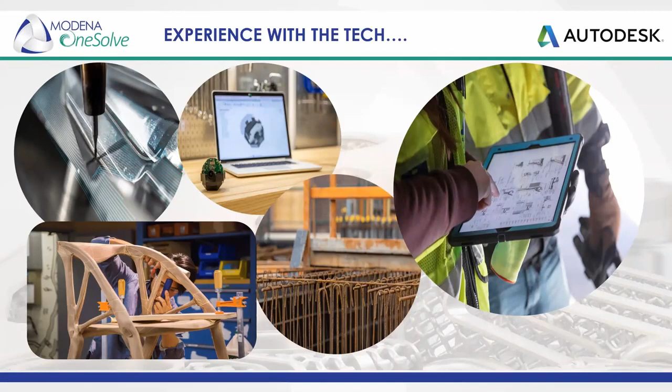So first, I want to show you guys and whet your appetite about the new possibilities we get in BIM and Vault, BIM 360. I know a few customers had a concern about what the future holds for Vault, but with this integration, you'll see Vault is definitely here to stay.

Autodesk Vault 2020 continues to improve design collaboration with Project Sync in Vault Professional, directly in response to your feedback through the Autodesk community. Working with our Vault customers who manufacture custom building products around the globe, we see more and more projects that require design collaboration outside your company's firewall.

New in Vault Professional is Project Sync, a secure way to share just the data that you choose between Vault and BIM 360.

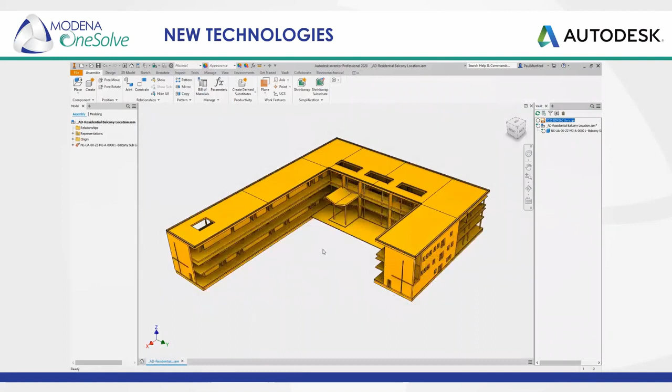Autodesk Vault is purpose-built to help our customers efficiently manage their engineering data, improve collaboration within their teams, and take control of the design development process.

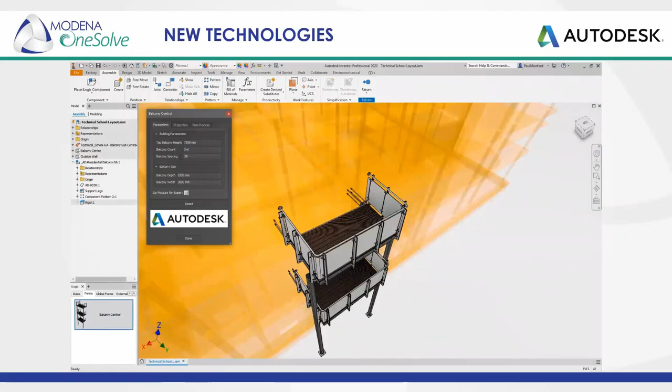BIM 360 is an online platform connecting your project teams and data in real time, from design through construction, supporting informed decision-making throughout the project lifecycle.

Eliminate file sharing by email, eliminate the need to download or upload files from an FTP site, and reduce the opportunities for errors in transmission.

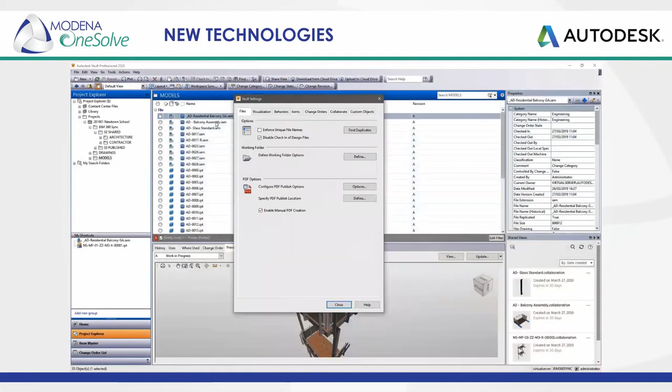Now your relevant design data is synced between Vault and BIM 360. Upload from Vault to BIM 360, download from BIM 360 to Vault, or set up specific folders to sync in both directions without the need for user interaction. As the project administrator, you can control on a project-by-project basis which data should be pulled from BIM 360 to Vault, pushed from Vault to BIM 360, or synced in both directions.

To be clear, it's not all your data—just the data that you choose will be synced, with full permission control. Streamline collaboration by securely syncing selective data to your extended project teams with Autodesk Vault Professional and Project Sync.

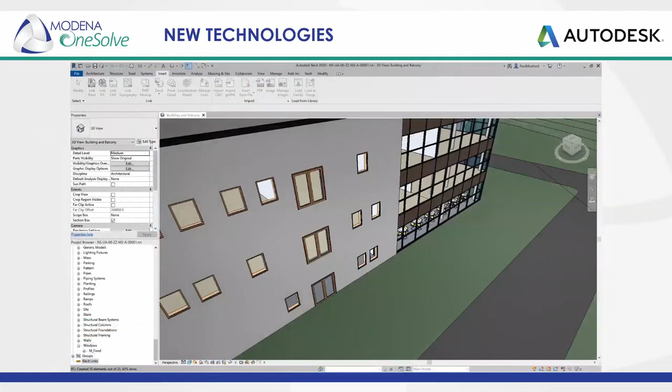Autodesk Vault 2020 continues to build on your feedback from Autodesk Ideas, forums, and the beta community with these usability improvements.

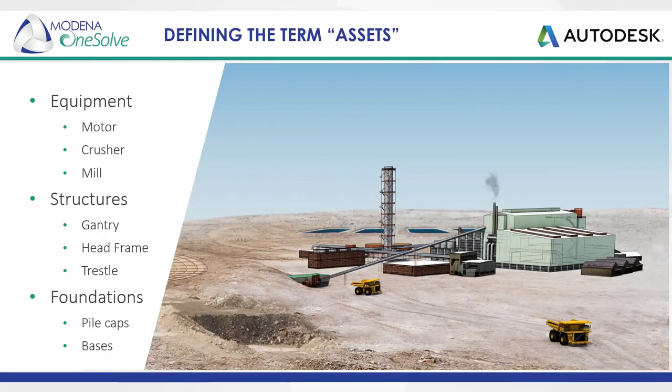Before we start talking about the tracking of assets, we need to actually look at what defines the term asset. Now, it's not assets we talk about in accounting terms—this is anything that can be populated on a list. It's anything that we can actually define on that list, and that means we can track it. So whether it is equipment, structures, or foundations like pile caps, we actually define that as an asset in BIM 360.

We're tracking different materials and assets throughout this life cycle, from when it's digital to when it's installed on site. It controls basically everything on the project, and that's why I mentioned it—it's the key underlying factor for us.

It controls our costing, it controls our schedules, and more importantly, it triggers milestones. Certain installations or certain structures going up and being commissioned at a certain level will trigger a milestone for the customer, and then they release payment on that basis.

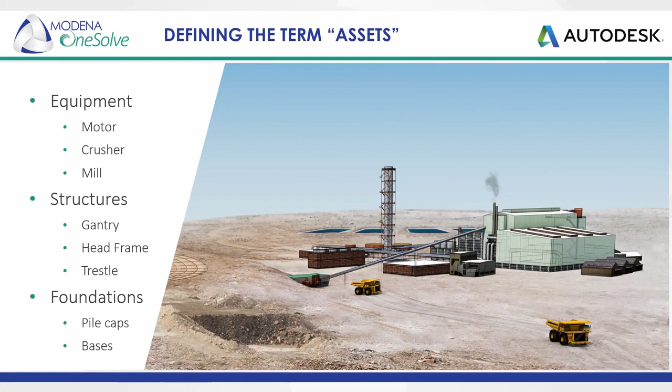Now, I think if we can imagine, by not doing these things and not tracking the assets, it can actually have dire consequences to our project and future to our company as a whole.

So for years, companies have actually tracked their assets via Excel or via little notepads, even from the stores, collecting a little book with that carbon paper in it. I don't know if some of you can remember those, but they did have a system of tracking it.

Now with today's fast-paced world and the need for information a lot quicker, we need these types of systems to become more intelligent. And when I say intelligent, I don't mean just updating the asset and the status of that asset, or where the asset is on site.

I'm talking about going further—about where an asset update triggers an invoice, a model that automatically gets updated, schedules that should be adjusted, things like construction sequencing being affected because a part's not on site, but then an early alert has to go out. That is where we would like the BIM 360 asset module and Build to go.

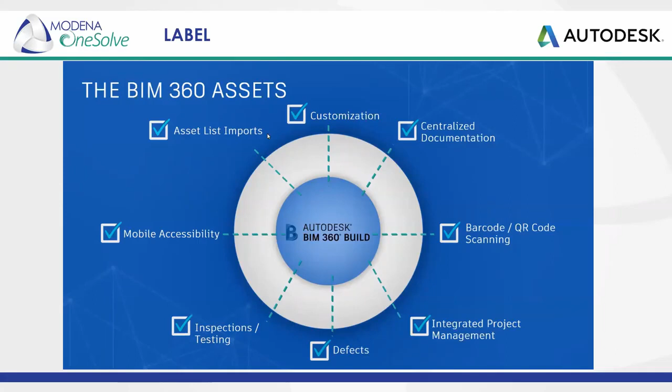So this example I've shown you guys now is how a typical workflow would be inside an asset module. First, we look at defining the project and the project requirements. In the first step, defining the asset and the properties, we call this creating the asset list.

We can then break them down into categories. Categories would typically be like manufacturer, or mechanical vendor supplied, mechanical internal, or structural, or you can create these categories up as you go along. This is completely customizable to you as an organization.

Then here we can also use other tools to make this even better. I won't delve into it too much, but you can use software like Assemble, that's also from Autodesk.

But when we import this all into BIM 360, we then can start assigning status sets to them. Now, these status sets is up to you as an individual. There's set standard ones, I'll go through them a little bit later. But you can use stuff like design, fabrication, in transit for road, in transit at sea, maybe some commissioning sign-off statuses, but it's up to you what you want to have there.

We can also use this link to link the issues to assets at the bottom and review them. And then we can track them.

So using the barcodes, we can then obviously scan the asset and have direct access to that specific item. Instead of going through all these assets to try and find it, you just scan the barcode and you'll be able to pick it up, and it will pull up all the relevant information, including its issues, checklists, attachments, anything that was attached to that asset.

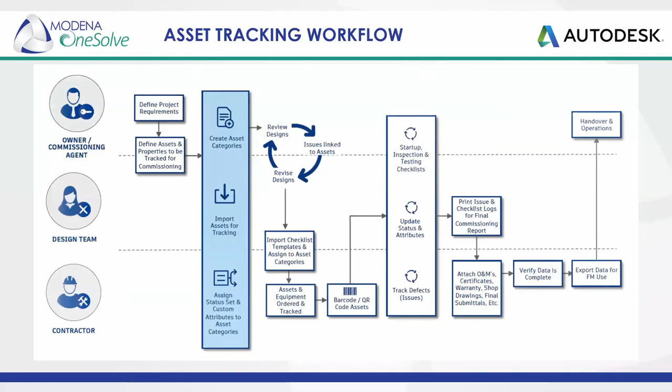And this is the start of it, right? So that has to be done correctly and efficiently.

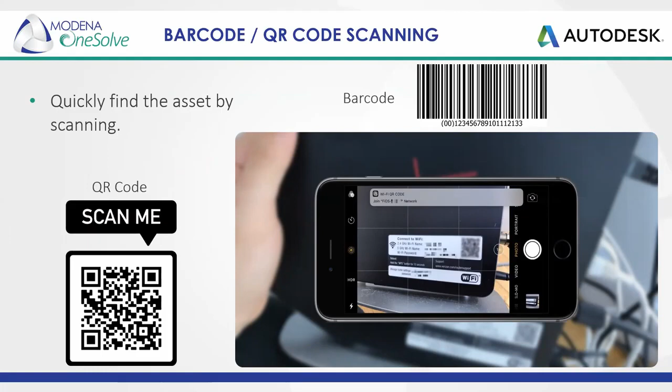I'll move on. So I'm coming to the end of my slideshow, but the crux of this is if we can control our assets, we'll have faster commissioning, less risk, and we'll know exactly what is where and how it got there. I think our planning can be better. There are massive advantages to being able to track your assets, to know where is what, for planning, scheduling, costing, and so forth.